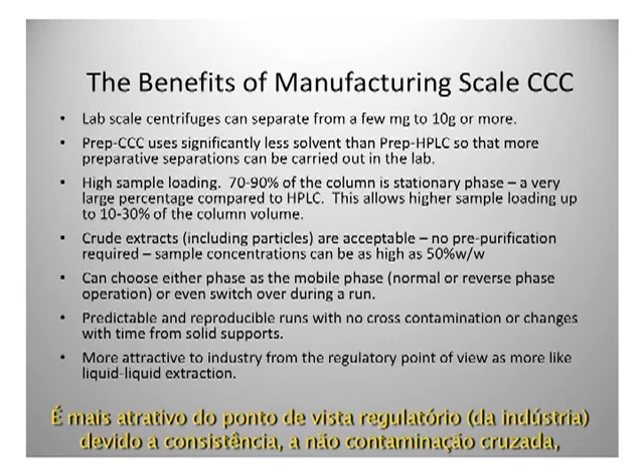And so in total, and I've already mentioned this, it is more attractive from a regulatory point of view, because the consistency, the lack of cross-contamination, the loading, all means that from a regulatory point of view, CCC has tremendous advantages when you scale it up.

Now when you're talking of scale up, the two important factors are how fast you do your run and how much you can load on each run. The faster you can do your run, the more runs you can do in a day, the quicker your separation is. The more you can load, the more you get done per run. Now your speed times your load, the product of the two, is your throughput. That's how much material you process, how much pure material you create in a day or a week.

Now, when you produce a graph of speed against load, here you have the speed from low to high along the axis, and from low to high on the vertical axis. HPLC, preparative HPLC, sits about there. In other words, the speed is moderate, it's okay, but the loading is poor. It's a very low loading on Prep HPLC.

If you go to normal phase HPLC, the speed is about the same, but the loading is slightly better. You can actually put more material onto normal phase chromatography. Flash chromatography is even better; you can see that you can load even higher amounts on. If you want to increase the speed of your HPLC, you can go for supercritical fluid chromatography, where the lower, less viscous mobile phase means you can push through higher flow rates, so you increase the speed.

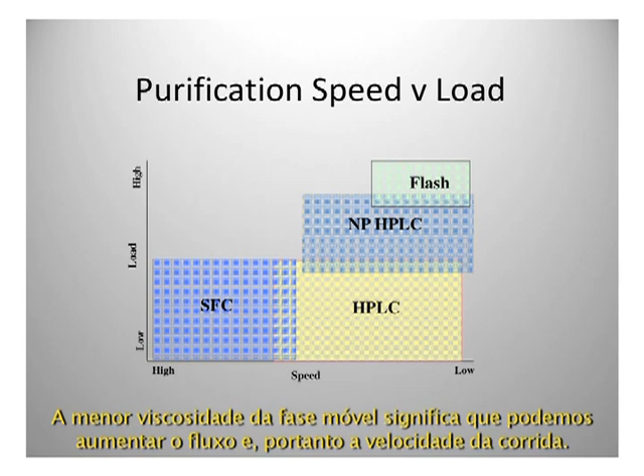Now, you'll see at this point here, there's a hole in the graph about there, and that is where I want to place high speed or high performance CCC. Now here I'm talking about high loadings and high speeds, and this is for talking about the high performance machines. So the high performance machines do very fast runs and they have high loadings as well, and that's where CCC fits in for the preparative scale.

So which one do we scale up? We've talked about hydrodynamic and we've talked about hydrostatic CCC. Which one do we scale up?

Now, as a brief bit of revision, I'm sure you all know this by now, the hydrostatic CPC, centrifugal partition chromatography, has a whole lot of interconnected chambers and is spun on a single axis. The mixing inside those chambers is a cascade mixing, just a jet of one liquid through the other. On the other side is the hydrodynamic, which is spun in planetary motion and is a single coiled tube. The mixing inside the hydrodynamic is a wave mixing.

The important point in why it's called a hydrostatic machine is that if you are spinning a hydrostatic machine and you switch off the pump, the mobile phase pump, then your stationary phase stays where it is. It is trapped in the little chambers. So your stationary phase is held in place by the design of the machine, and that's why it's called hydrostatic. The mass transfer occurs in each of those little chambers.

That says pretty much the same thing. The hydrodynamic behavior occurs in each chamber. And the most common form is the centrifugal partition chromatograph, where there is a series of interconnecting chambers and it spins on a single axis. But you need to remember that rotating seals are required. So that's a summary of the hydrostatic machine.

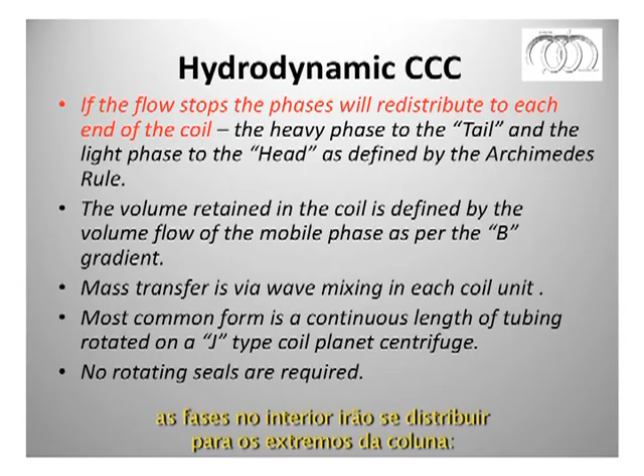In contrast, the hydrodynamic machine - if you're spinning it and you switch off the pump, the flow, the phases inside will distribute themselves to each end of the coil. The heavier phase will go to the tail of the coil and the lighter phase will go to the head of the coil. So even though you're not pumping anything, if the spin stays and you stop the flow rate, the phases distribute themselves to each end of the coil, and that's why it's called hydrodynamic.

So that means the volume of stationary phase retained in a hydrodynamic machine is very dependent on the mobile phase flow rate, whereas in a hydrostatic machine it was less dependent on the flow rate. The mass transfer is via a wave mixing that occurs within each coil loop. And the most common form is the J-type centrifuge, the J-type CCC, which we've been talking about a lot. But no rotating seals are required. You do have flying leads, but there are no rotating seals on the hydrodynamic machines.

Now in this talk, I'm going to be talking about scale-up of the hydrodynamic CCC, hydrodynamic countercurrent chromatography. Although there might be some debatable points here, we believe at Brunel University that there are challenges with scaling up the hydrostatic machines.

One of them: with a hydrostatic machine, the pressure is quite large, and when you scale it up, you can get some very high pressures. Remember, you've got rotating seals at either side, and higher pressures give you a bigger challenge to keep those rotating seals with high integrity.

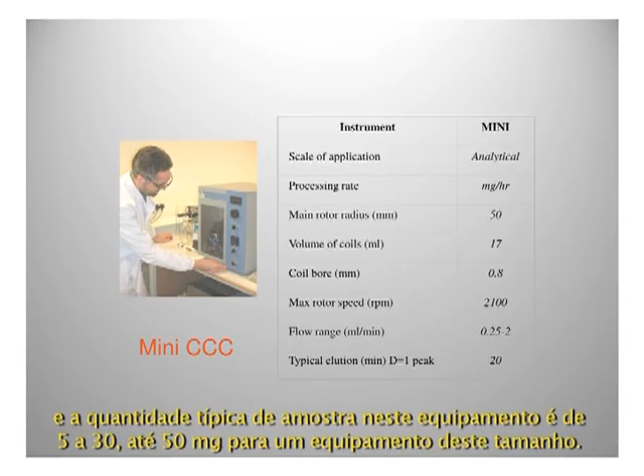Typical loading on this machine will be anything from 5 to 30, even up to 50 milligrams, on a machine this size, about the size of a microwave oven. To be able to inject 50 milligrams on a machine this size is quite impressive, because on an HPLC you'd need quite a large HPLC to be able to do that.

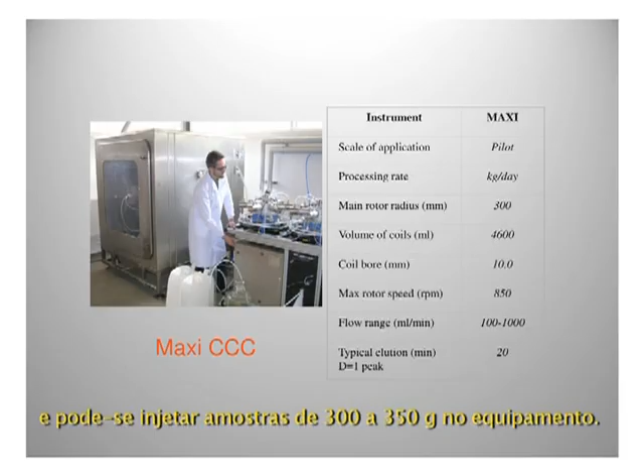Flow rate range is usually around about 600 mils a minute. Still the same runtime, 20 minutes, for a D equals 1 peak. And we can inject anything up to around about 300, 350 grams on this machine.

All of these machines are housed in the Bioprocessing Centre at Brunel University. Any of you are welcome to come and visit us. We're a research centre, we don't have any secrets in the machinery and what we've got in the Bioprocessing Centre. I'd suggest a good plan would be to come to the conference at Lyon in July, and London is only a short trip away. I'm happy to see any of you, I'll show you around the centre, show you the machine, and we can even look at how you could do some separations.

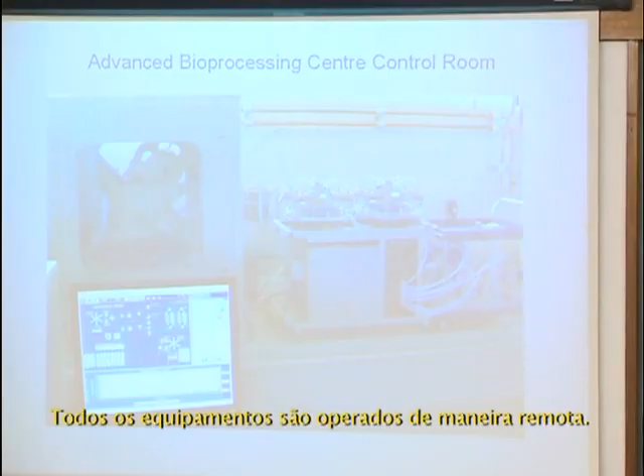In the front is a computer, a laptop with the software that runs the machines. But the important point about this particular operation is that the computer is in a different room, an operator room. You're taking the picture through a sheet of explosion-proof glass. All of the equipment in that room is remotely operated.

You put protective equipment on, such as the usual lab coat and gloves and mask if necessary, in order to go into the room to set up the machines, load your sample, put the solvent systems in place and so on. But once you've done all the setting up, you come out of that room, shut the door, and go into the operator room, where you can then run the machines.

Here is one of my colleagues, Peter Hewitson, doing a run. He is performing a CCC run on the large preparative machine, entirely operated from the operator room. The nice thing with the operator room is it is a clean room, you can take your cup of tea in there and your sandwiches.

The software was designed specially for us, a modification that Armen did for us. I don't need to go through the details of the software.

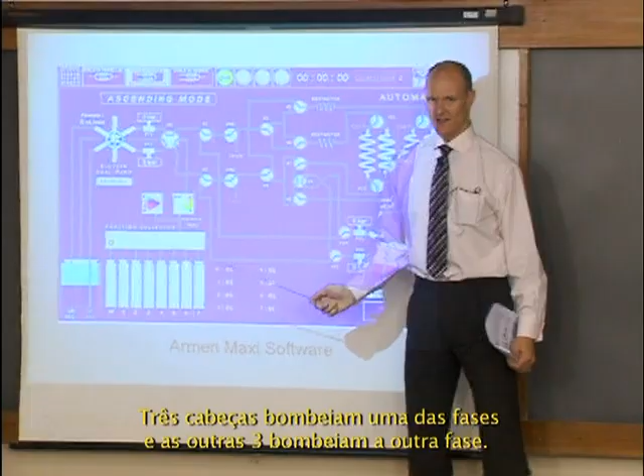Here are the two CCC machines. This is a 6-head pump, which is the elution pump. 3 of the heads will pump one phase, and 3 of the heads will pump the other phase. So we get a nice smooth flow with 3 heads, but we can very quickly switch from one phase to the other.

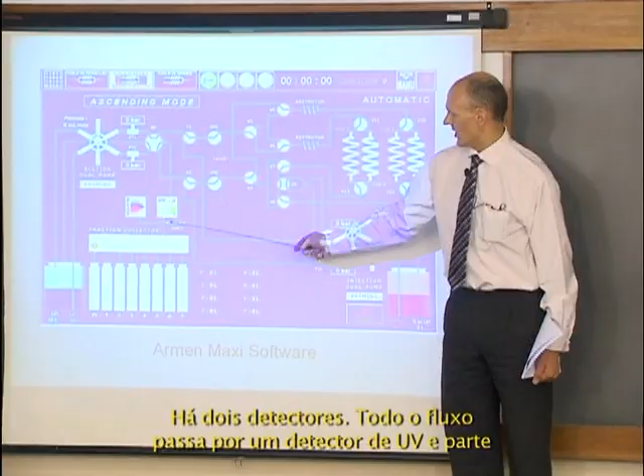And we've got all this complicated valving system in order to be able to do that. We have another pump here to introduce the sample, so we can introduce a sample from the upper phase, from the lower phase, or from both if necessary, using this other 6-headed pump. There are 2 detectors. The whole flow goes through a UV detector, but we've also got a bleed to a light scattering detector to make sure we don't miss any components. And then we've got the fraction collector just down here, so we can collect all the fractions. It's quite a good system with a good bit of flexibility in how we operate it.

Now, let's talk a little bit about the theory of the scale-up. You've seen this diagram several times.

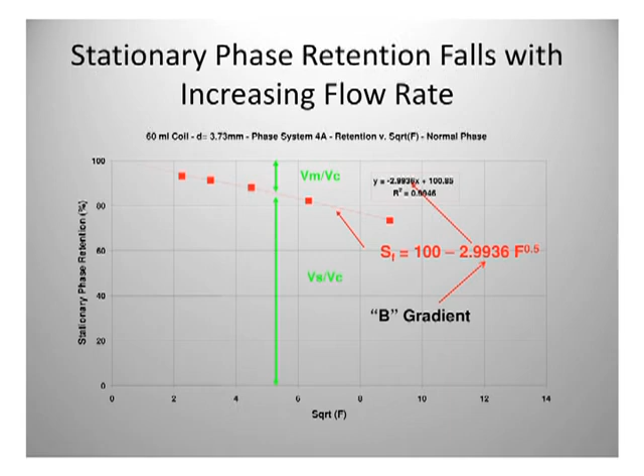Basically, the more stationary phase you retain in your CCC coil, the better resolution you get. So a lot of effort goes into trying to retain a high percentage of stationary phase in the coil. Now, as you know, when you increase the flow rate, you get less stationary phase in your coil. You just push more of the stationary phase out.

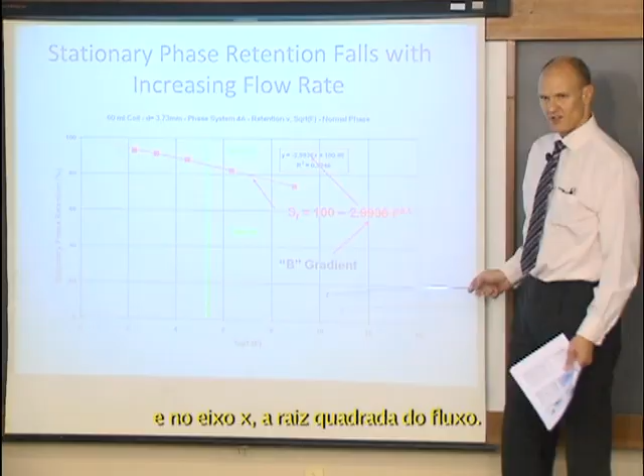This is a plot known as the Du plot, from the person who discovered it. What you have is the percentage stationary phase retention from 0 to 100, and along the bottom is the square root of the flow rate. It's the square root of the flow rate, because then you get a linear relationship between the stationary phase retention and the flow rate. So this point here is at 2.2, that'll be a flow rate of 5 mils a minute. This is 10 mils a minute, 20, 40, 80 mils a minute. You get a linear flow rate, but you get a drop of stationary phase retention as you increase the flow rate. That's as you would expect.

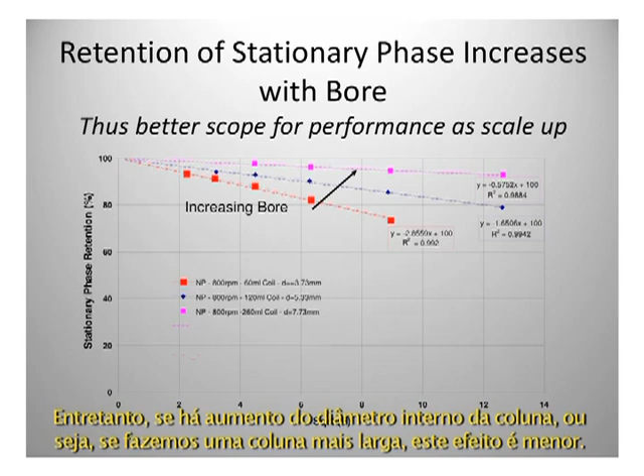Now, this is the line from the previous graph. However, if you increase the bore of the column, in other words, you make your column with a wider bore, this effect gets less. You get less drop in stationary phase retention with flow rate. So this one here is with a column bore of 3.73 millimeters. When you increase the bore to 5.33 millimeters, the effect is less. When you increase it to 7.73 millimeters, it's even less. So your stationary phase is more stable in the column with a greater bore, with a bigger bore.

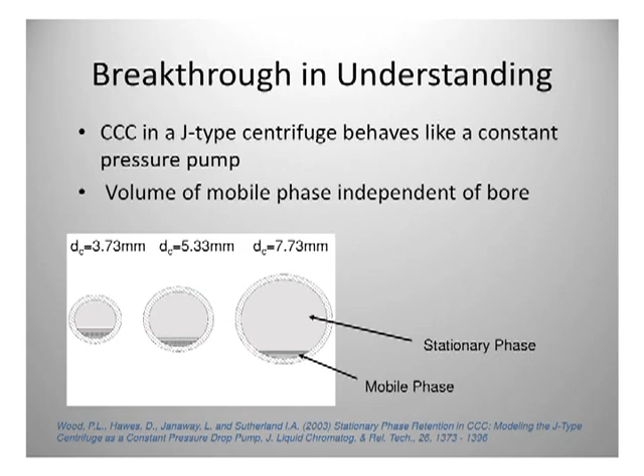The breakthrough in understanding, which produced a paper that I've referenced down here, was that the amount of mobile phase stays the same. But when your bore increases, that means that proportionally you have more stationary phase. And that was the breakthrough in understanding.

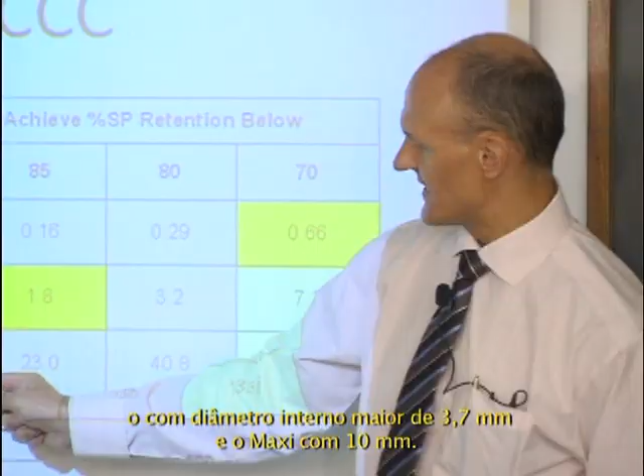Here's the effect it has, and I like to claim that this slide shows that scale-up with CCC gets better the bigger you make it. Here's 4 CCC instruments: the MIDI with a small bore of 1.6 millimeters, a wide bore MIDI with 3.7 millimeters, and the Maxi with 10 millimeters. So you've got 0.8, 1.6, 3.7, and 10 millimeters bore - that's the bore of the coil. Those are the machines down here.

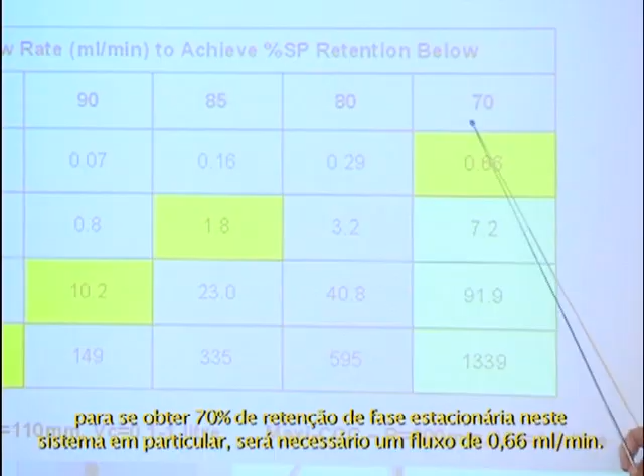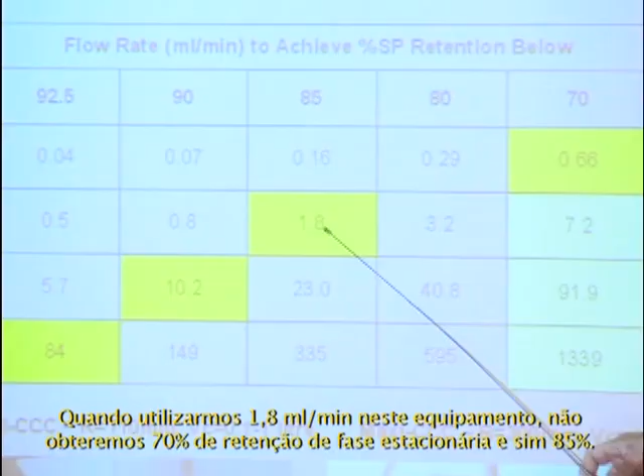In the table here is the flow rate required to get the stationary phase retention shown up here. So if we start off on the mini machine, the smallest machine with a 0.8 millimeter bore, to get 70% stationary phase retention for this particular phase system, you'll need 0.66 milliliters per minute flow rate. Now, if you want to scale up to 1.6 bore, and you do the calculations to find the flow rate needed to get the same stationary phase retention, the calculations tell you 1.8 mils a minute. When you actually go into the lab and type in 1.8 mils a minute on this machine, you don't get 70%, you get 85% stationary phase retention.

So you think, okay, I can up the flow rate - how much can I up it? Well, you can increase the flow rate to as much as 7.2 mils a minute and still get your 70% stationary phase retention. Again, you can do the calculation for the bigger machine, the wide bore mini of 3.7 - the calculations say 10.2 mils a minute will give you 70% stationary phase retention. In actual fact, you can have 92 mils. And likewise, when you go up to 10 millimeter bore, calculations say you'll need about 84 mils a minute, but in actual fact, you can go up to 1.3 liters a minute. So you are less likely to push your stationary phase out when you go for a bigger bore - the machine is more stable. The bigger machines are more stable.

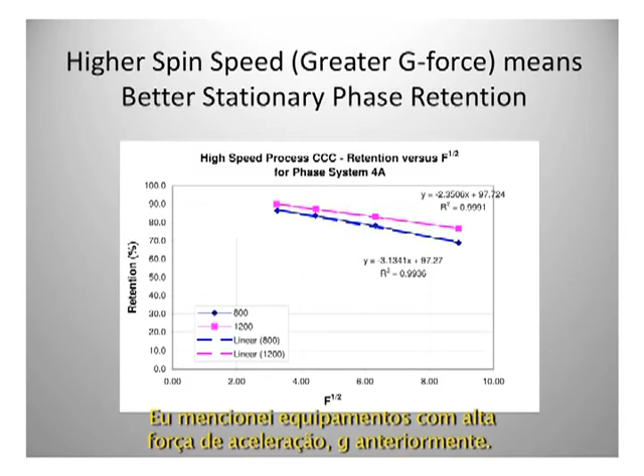Now, I've talked quite a bit about the G-force, and I've mentioned high G-force machines. The reason is fairly obvious: when you have a high G-force machine, you are more likely to retain your liquid stationary phase. Your machine becomes more stable.

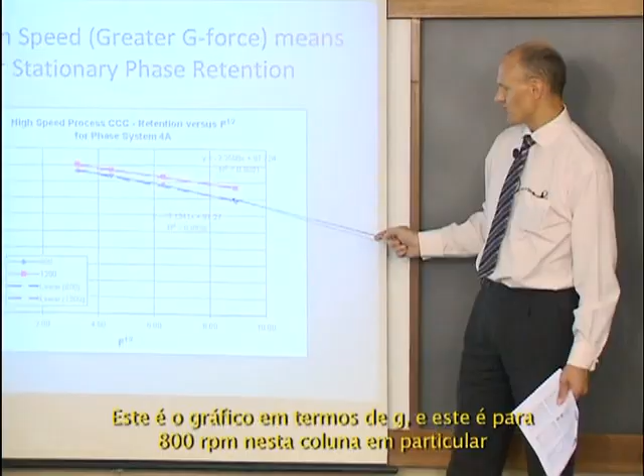Here again you have the stationary phase retention from 0 to 100, and here the flow rate has been square rooted. This is a Du plot, one for 800 revs per minute on this particular column, and this is what happens when you spin it at 1200 revs per minute. You can see you get an increase in stationary phase retention of about 10% for that increase in spin speed. So spin the machine faster and you can retain the liquid stationary phase better. That's as you'd expect.

But when it comes to scale up, you also get higher throughput when you spin the machines faster. Here we have the sample throughput, in milliliters injected per hour - how much we do per day of injections or sample. And here's the flow rate, this time straight in milliliters per minute.

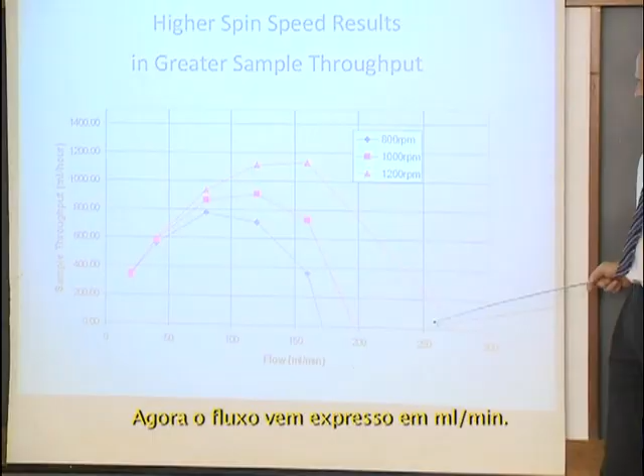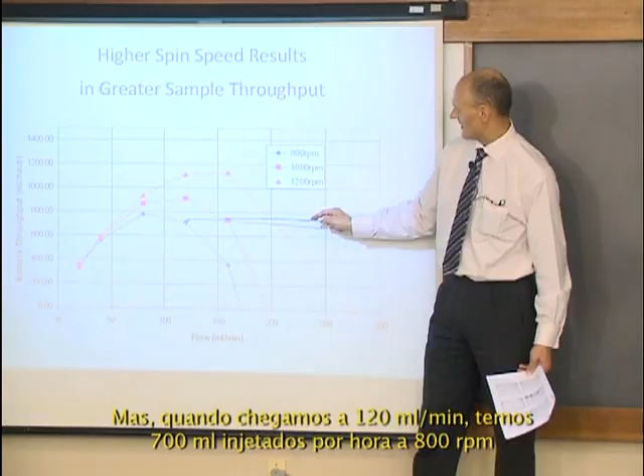This curve here is at 800 revs per minute, this one at 1000 revs per minute, and this one at 1200. You can see that at 40 mils a minute, it doesn't make much difference what the spin speed is - it's about the same for all three. But when you come to 120 mils a minute, you have 700 milliliters injected per hour at 800 revs per minute, or you can raise that up to 1100 milliliters per hour at the higher spin speed, 1200.

When you come up to 160 mils a minute, you basically start losing it all at the lower spin speed. But you're still increasing in sample throughput, not much - it's plateaued a bit - but still increasing slightly at the higher spin speed. So you get much better throughput of sample at your higher spin speed.

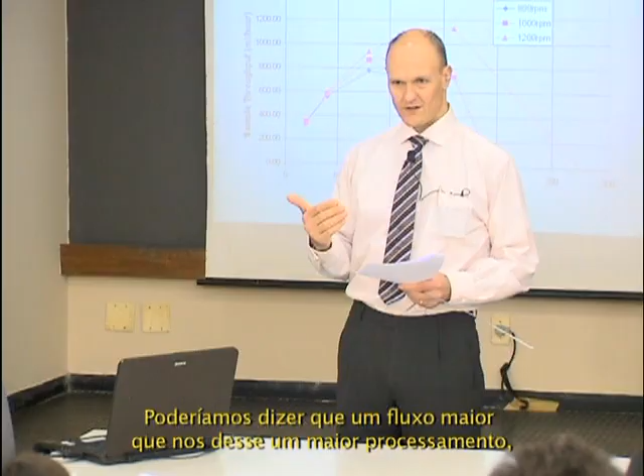You might say that a higher flow rate, in order to give you higher throughput, might mean you get more sample through but you lose your resolution. Well, you do, but not by very much.

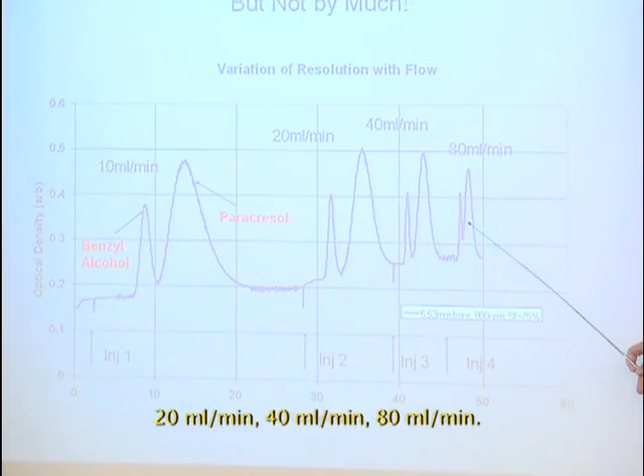This is on a wider bore column, 5.53 millimeters, with an injection of two standard compounds, benzyl alcohol and paracresol, at 10 mils a minute, and you can see you get almost baseline resolution. 20 mils a minute, 40 mils a minute, 80 mils a minute - there is a loss of resolution, but it's not a huge loss, and you're getting considerably faster throughput of sample.

So the wider bore columns retain the stationary phase better, you can inject more sample, you can drive them harder, and you don't get much loss of resolution.

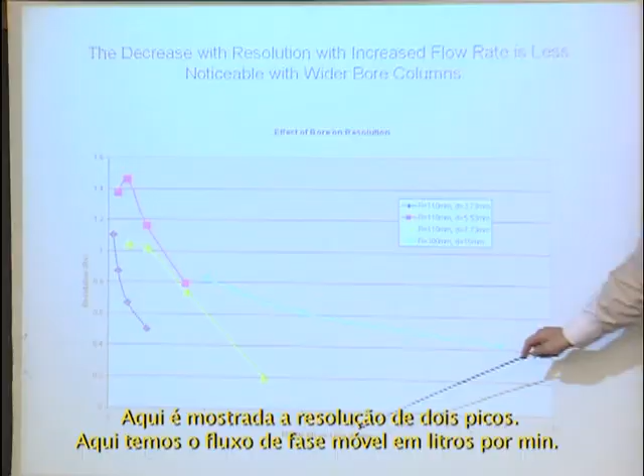Here you have the decrease in resolution, showing that the wider your column bore, the less your resolution declines when you increase the flow rate. Here you have resolution of 2 peaks, here the mobile phase flow rate in liters per minute, and here it's shown for 4 different column bores. The dark blue line is for a column bore of 3.73 millimeters. You can see that as you increase the flow rate, your resolution drops dramatically - you just lose your resolution completely.

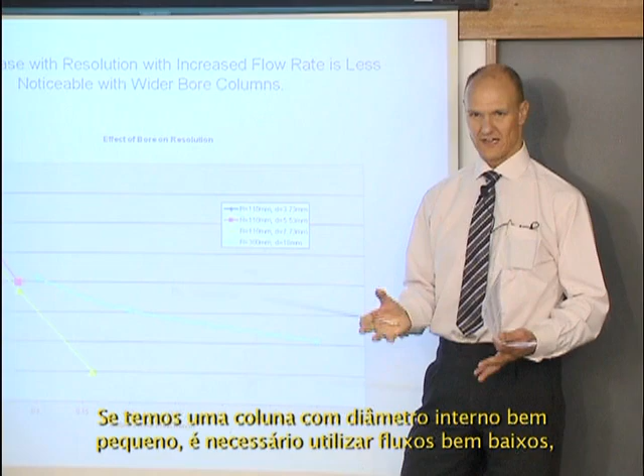So if you have a small bore column, you need to run it really slow, otherwise you get very poor resolution. When you go up to 10 millimeters, as you increase the flow rate over a very wide range, you don't get that much of a drop in resolution - the line is fairly stable. So with a wider bore, you can increase the flow rate and not lose your resolution very much. The wider you make the bore of the column, the more you can increase the flow rate and the less you lose in resolution.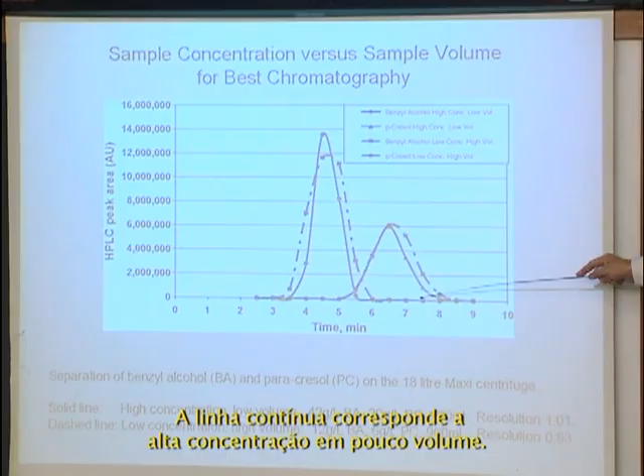This slide asks the question: which is better? Is it better to inject your sample with high concentration and low volume, or with low concentration and high volume? Here are the benzyl alcohol and paracresol injected. The solid line is high concentration and low volume. The concentration was 42 grams per litre benzyl alcohol, 20 grams per litre paracresol, and 290 milliliters was injected onto the 18-litre machine.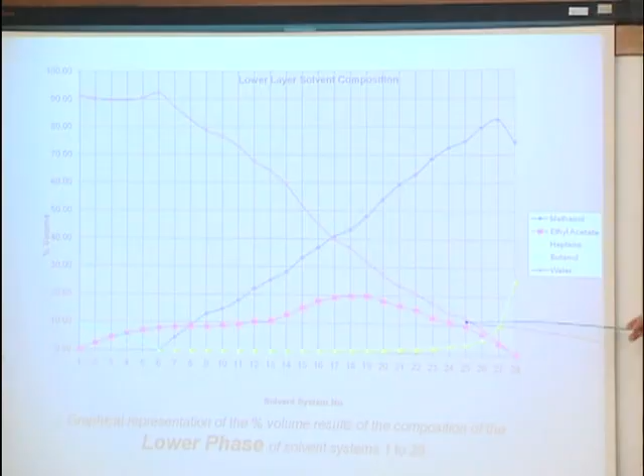There are two advantages to analysing the phase system. The first is we make up as much upper phase and as much lower phase as we need, making it up to order using that composition table from the analysis.

The second advantage is we recycle the phase. When we've done a run, we collect the fractions and dry them down anyway. We take the solvent out of the rotary evaporator, do a quick analysis on the gas chromatograph, then reform the composition back into the mobile phase, and it goes back into the machine for the next run. So there's a recycling of the phase.

What we tend to find is if you're using a hexane ethyl acetate methanol water system, and you're using the hexane ethyl acetate phase as the mobile phase, the chances are you will have just lost a bit of hexane. That's usually all you need to top up, just a touch of hexane, and it can go back into the machine, remaking the solvent phase back as it was.

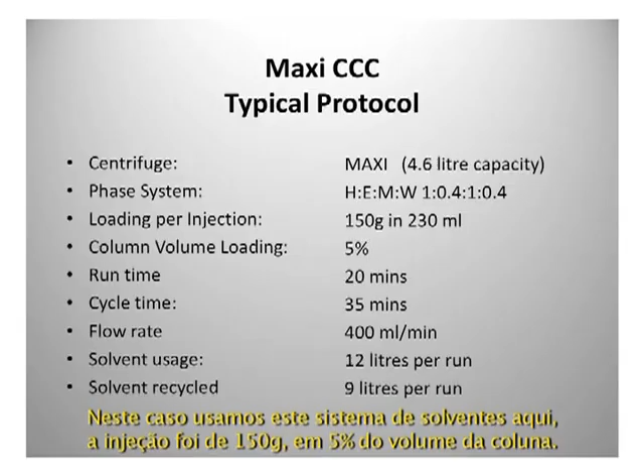So this will be a typical protocol for the 5-litre machine. In this case we're using this solvent system here. The injection was 150 grams in that material, which is 5% of column volume. The run time was 20 minutes.

Cycle time is 35 minutes. In other words, the run finished in 20 minutes, but it then took another 15 minutes before the machine was ready for the next run, for dealing with fractions or whatever.

That's the flow rate. 12 litres of solvent are used per run, but 9 litres of that is recycled. The only reason the other 3 litres aren't recycled is that those fractions were so grotty it wasn't worth the effort of drying down the solvent - we just decided we'd sacrifice 3 litres of solvent per run.

You could recycle the whole lot, but you've just got to dry down the whole lot, and we decided they were so mucky it wasn't worth it. So that is a typical protocol - a large percentage of the solvent is actually recycled during the run.

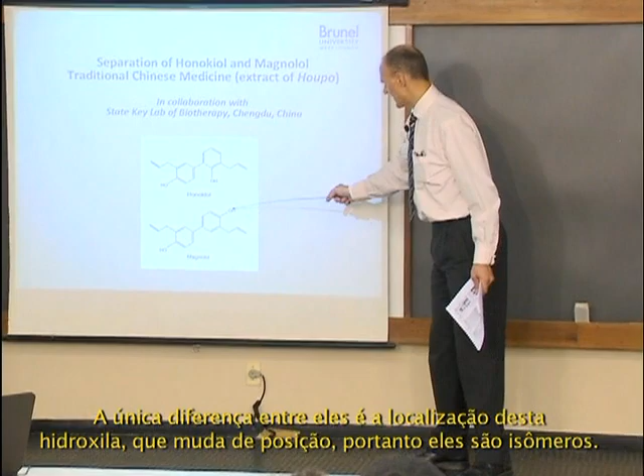Now, I talked a little bit about injection loading - here's a bit more detail. This particular example is a separation of two compounds, honokiol and magnolol, both natural products from Chinese medicines. The only difference between them is the location of a hydroxyl group, which has just changed position, so they're isomers.

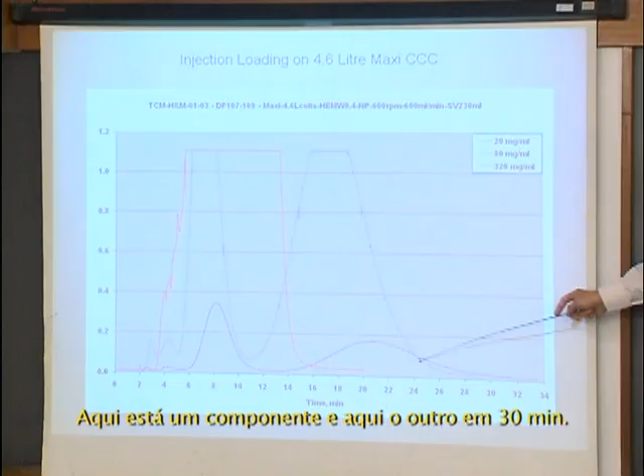When we were doing this run, we started off injecting 20 mg per mil on the 5-litre, 4.6 litre machine. That gave this chromatogram - there's one compound, there's the other, 30 minutes here. We got really good separation, with small peaks.

We thought we're obviously not loading the column enough, so we went 4 times bigger and injected 80 mg per mil. That gave this chromatogram, obviously with considerably more compound eluted, and we've still got almost baseline resolution between the two components. So we thought, well, we haven't reached the limit yet.

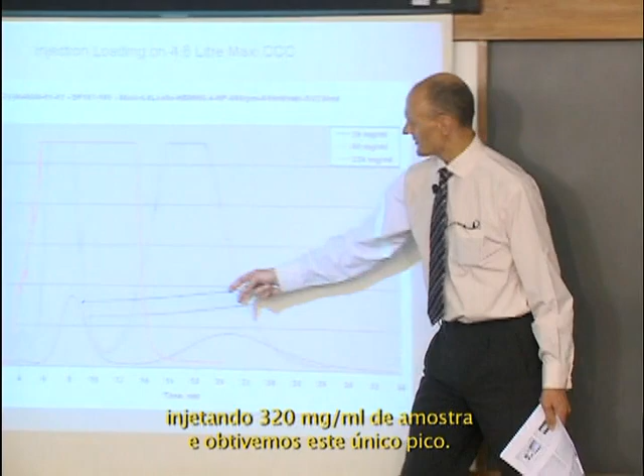Let's go the whole hog - we injected all the rest of the sample at 320 mg per mil, and got this single peak. We noticed it came off in 16 minutes. We thought, oh dear, we've blown it - we've just gone and achieved nothing, the sample has come off in a single peak.

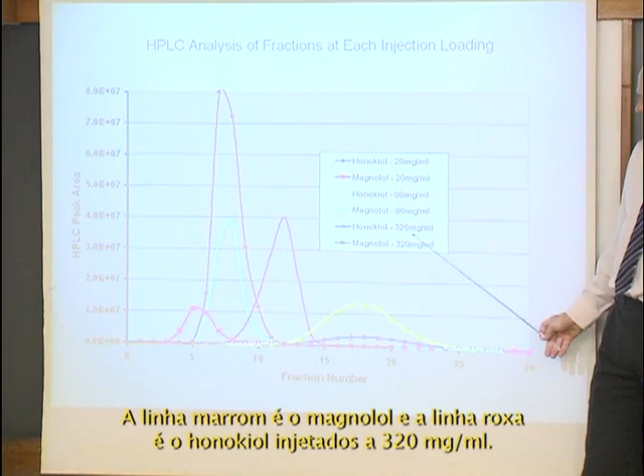But fractions were taken across that peak, and here are all the fractions and their analysis. The brown line is the magnolol, and this purple line is the honokiol at that injection of 320 mg per mil. You can see you've got not a bad separation, even though it came off as a single peak. So the separation occurred, even though when we looked at it, we thought we'd actually just blown it and come off as a single peak.

Now, for the rest of my talk, I'm going to talk about three special modes of operation. So far, we've talked about standard, traditional countercurrent chromatography - hydrodynamic CCC, where you have a simple coiled tube spun in planetary motion, creating waves of mixing and settling. Being a research centre at Brunel University, we're interested in finding ways that might be more efficient and better, particularly with respect to improving the scale-up and getting better throughput of compounds.

The first I'm going to talk about is toroidal coil CCC, which is particularly interesting for the purification of biomolecules. Normally CPC, the one with all the little chambers, hydrostatic CPC, is used for purification of proteins, DNA, plasmids and viruses, because the stationary phase can be retained in the coil by being trapped in those little chambers. However, industry doesn't like CPC very much because of the danger of cross-contamination, the difficulties in scale-up, and so on.

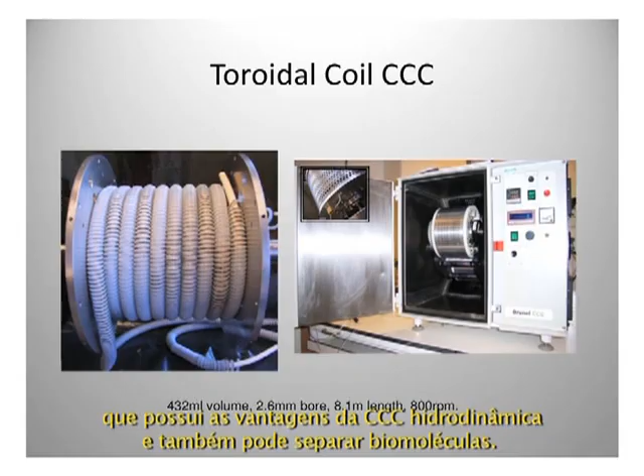So we have made this machine, which is a toroidal coil. It was initially invented by Dr. Ito, but we have created this toroidal coil machine, which has the advantages of hydrodynamic CCC but can also separate out biomolecules. The way it works is your coil, instead of just being coiled round in a multi-layer coil, is coiled round like this and then like that - almost like taking a hollow telephone cable and wrapping it around in a coil. Then it is spun in the normal planetary motion.

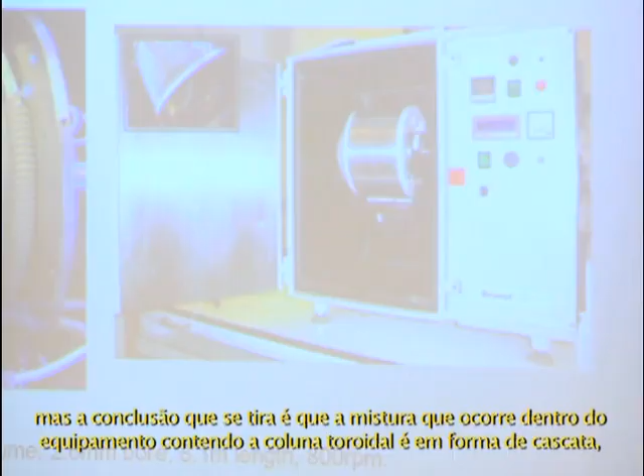As you can imagine, some fairly complex mixing goes on inside there. But the bottom line is that the mixing that occurs inside the toroidal coil machine is the cascade mixing that occurs in the CPC machine, not the wave mixing that occurs in the multi-layer CCC machine. So we've basically created a CCC machine with a single tube wound in this toroidal coil manner - it's got a single tube, but it's got that cascade mixing.

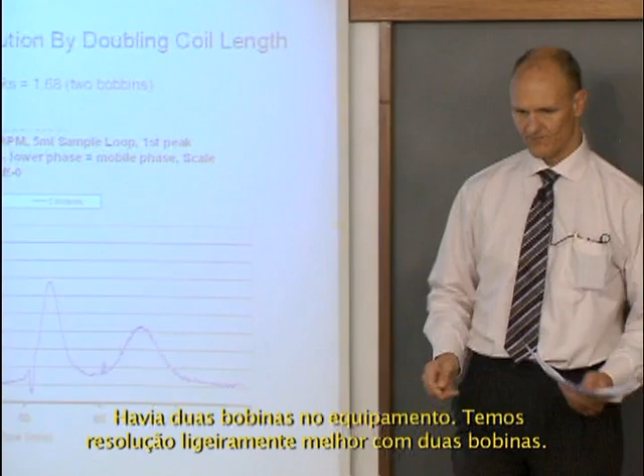So how does it perform? Here we have the injection of two proteins. If you look at the green line first, this is lysozyme and myoglobin, and separation has occurred here with just one bobbin, and this is a separation with two bobbins. Both had two bobbins on the machine, so you get slightly better resolution with the two bobbins for a longer time. The separation here is about the same performance as would occur on a CPC machine.

The reason we think the toroidal coil is going to be important for scale-up is that because it's just a single tube, you can clean it easily, deal with particulates, and it can be scaled up. We found that when putting the aqueous two-phase systems required for proteins into a multi-layer CCC coil, we could retain the liquid stationary phase very easily. That wasn't a problem, but we still didn't get very good separation, because we weren't getting good mixing of the two phases. The wave mixing works very well with aqueous organic solvent systems, but not so well with viscous systems like aqueous two-phase systems. So the different mixing of the toroidal coil machine solved that problem - we get both retention and mixing, and therefore separation of the proteins.

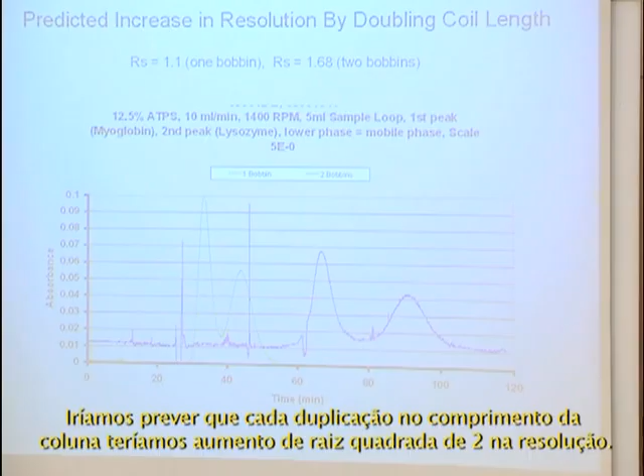Here we've basically increased the coil length in order to give better resolution, and the resolution has increased as predicted with CCC theory. You would predict that for every doubling of the coil length, you get a square root of 2 increase in resolution - the resolution is proportional to the square root of the coil length. So you double the coil length, you get a 1.4 times improvement in resolution, and that is exactly what we see here. So it's behaving as predicted by CCC theory.

However, what's interesting here - here's the resolution again in the toroidal coil machine, and here is the rotational speed. As you increase the rotational speed, we get an increase in resolution, but then it plateaus. That was puzzling us for a while.

Then we realized in the toroidal coil machine you have these loops - remember, they go round like this and then round in the coil. As the machine spins in its planetary motion, the mobile phase at low spin speed will run round the walls of those loops - it'll stay stuck on the walls and run around them. As you increase the spin speed, you pull that mobile phase away from the walls and it starts going down the middle of the tube, and you get much better mixing.

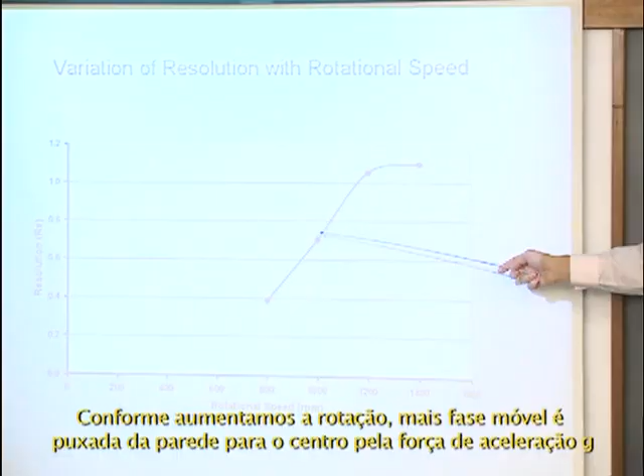As you increase the spin speed, more of the mobile phase is pulled away from the walls by the g-forces, and you then get it passing down the middle of the tube. But you don't get any further improvement because the mobile phase is jetting down the middle of the toroids. That is the theory as to why we get this plateau in resolution at a certain spin speed.

So for the toroidal coil machine, there is an optimum spin speed, and on our particular machine, there is no point in running it more than 1200 revs per minute. That's different from the normal multi-layer CCC.

This slide shows the big advantage of the toroidal coil machine. You have a run where you've got something coming off the solvent front. Here's the separation of the two proteins, lysozyme and myoglobin, that we did before.

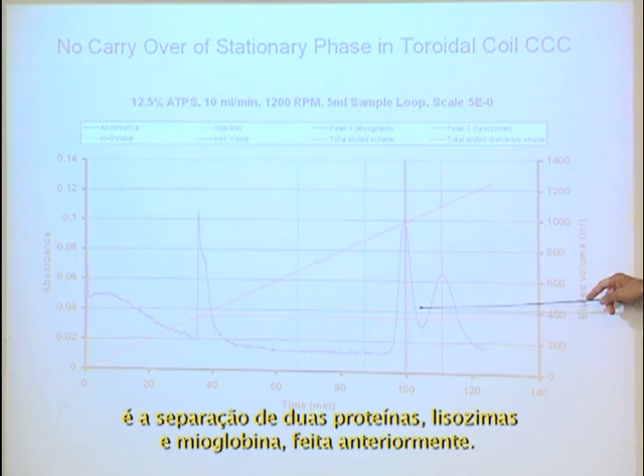This line here shows the eluted volume, so this is what was coming out at the end of the coil. And as you'd expect, you've got just a standard linear line because we kept the same flow rate all the time.

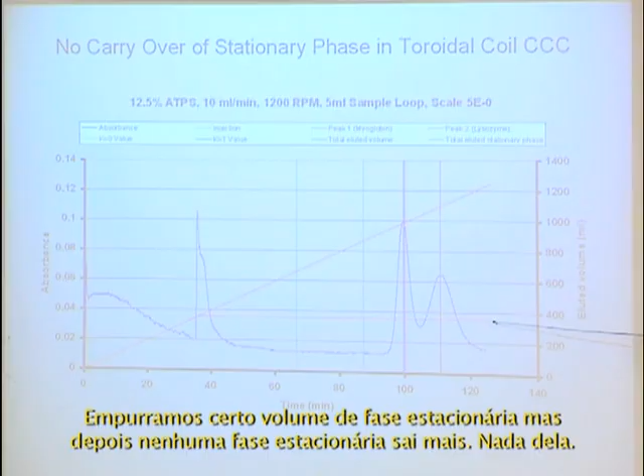But the orange line is the amount of eluted stationary phase, and the purple line is the amount of eluted mobile phase. You can see that when we started the run, we get stationary phase coming out at first, as you'd expect. You fill the coil with stationary phase, you start pumping, you start the spin, start the mobile phase. You push out a certain volume of stationary phase, but then no more stationary phase came out. None of it. The thing was very, very stable.

In other words, there was no bleed of stationary phase, and that is a big advantage because with CPC, you often get a bleed of stationary phase coming out.

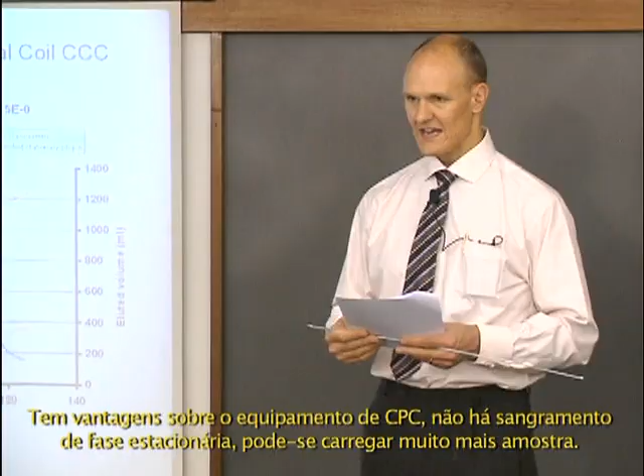So overall, this toroidal coil machine is, we think, going to be very useful for the scale-up of biomolecules and proteins and other fragile molecules that don't like aqueous organic phase systems. It has advantages over CPC machines in that you don't get any stationary phase bleed. You have much higher loadings. We calculated that you get about a 42% increase in throughput with the toroidal coil machine over a CPC machine.

It is scalable. There is no reason at all why the toroidal coil machine can't be made up to 5 litres, 18 litres, 40 litres. It is scalable, whereas the CPC machines have challenges in scale-up.

And finally, it's got the advantages over CPC — it's easy to clean, you can sterilize it, and it can cope with particulates as well. So the toroidal coil machine might well be the future for the scale-up of biomolecules and proteins.

Now going on to special mode of operation number 2, non-synchronous CCC, and this is for the perfect mixing and settling of solvent systems.

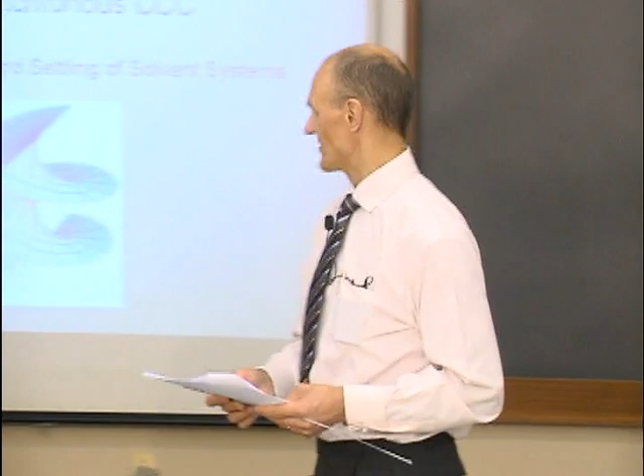Now, so far, we have talked about the synchronous CCC, J-type chromatographs. Called J-type, of course, because of the leads just here. And you have a stationary sun gear, and you have a rotating planetary gear, and this rotates around like this, so that it spins on its own axis, and it rotates around the stationary sun gear.

As you know, the leads don't twist up. I'm sure you've seen it in the model, and you've seen it actually in the lab. It's a little bit difficult to get your head around why the leads don't twist up, a little bit difficult to actually work it out. I quite like this picture showing why it is that leads don't twist up.

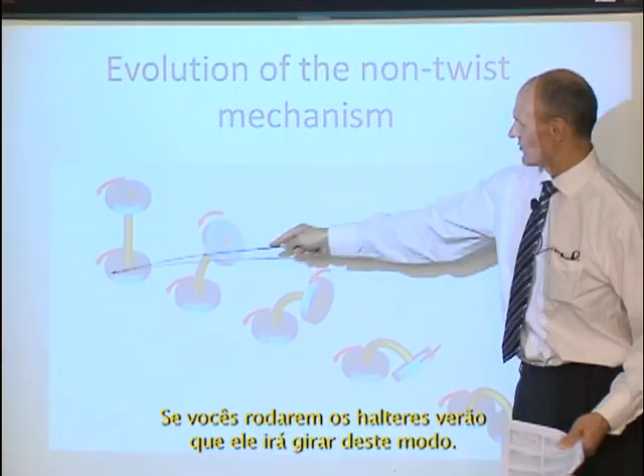Imagine you have a dumbbell, a bit like people use for weights, but this has got a rubber handle. If you rotate that dumbbell, you can see that this will rotate the same as that — no problem there. Now keeping it rotating, you just bend the handle over, and you will now have the two rotating like this, still with your handle in the center. And that is why the leads don't twist up. Here we've got both rotating, but what we could do is you could hold that one and just rotate this one around it. And there's your J-type CCC machine. That's why the leads don't twist up.

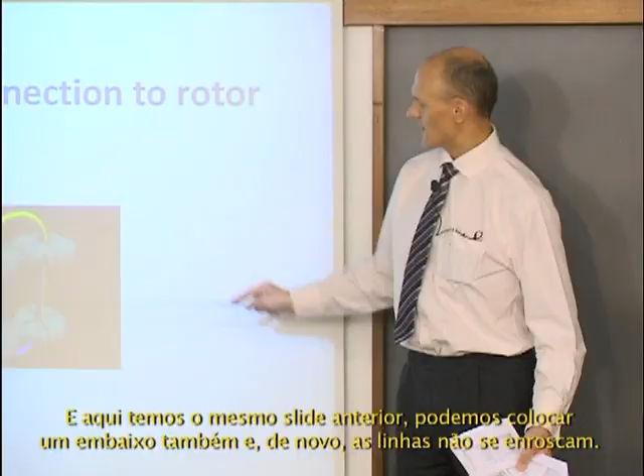And that just shows — here's the previous picture. You can put one on the bottom as well, and again, the leads won't twist up. So there you've got your J-type machine.

However, there's a penalty though. In order to not have the leads twist up on the J-type CCC machine, you are fixed to one rotation around the sun gear for one spin around its own axis. You're fixed to a 1-to-1 ratio — it spins and it rotates, and you're fixed to that ratio, meaning you get one mixing step and one settling step per spin around the sun gear. Is that the optimum? Could it be that you need more mixing steps, fewer mixing steps?

So this is the reason why you might want to look at a non-synchronous CCC, or this is the reason why we did this research. We thought perhaps there are some phase systems where you want lots and lots of mixing and then only settle it occasionally, or just a small amount of settling. Or it might be that you have a delicate phase system, like the aqueous two-phase systems, where you don't want to mix it too vigorously, but you want a very strong settling force.

So being able to alter that ratio of mixing to settling is what the non-synchronous CCC is all about. It's taking away from that 1-to-1 ratio and making it so that you can alter the amount of spin to the amount of rotation. But you might say, there's a penalty - you need a rotating seal, much like the CPC machine has.

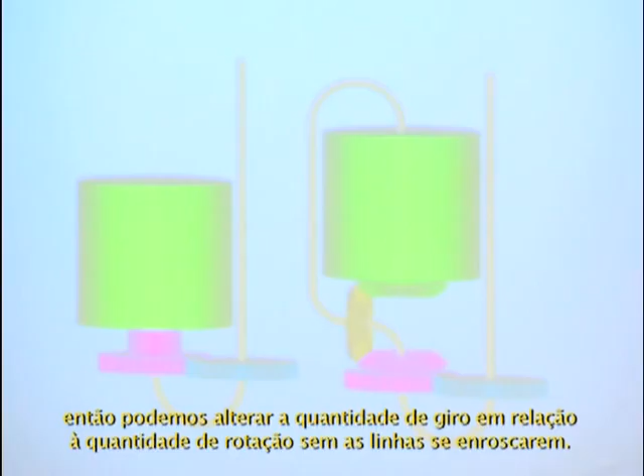No, you don't. If you design - and this has all been done by the engineers - here's your J-type machine. If you design your flying lead with this clever mechanism just here, then you can alter the amount of spin to the amount of rotation without this lead twisting up. Now, you might not quite be able to get your head around it, I can't, but trust me, it works. I've used this machine and I haven't seen the leads twisting up, so trust me, it works. The engineers will tell you how it works, but the leads don't twist up.

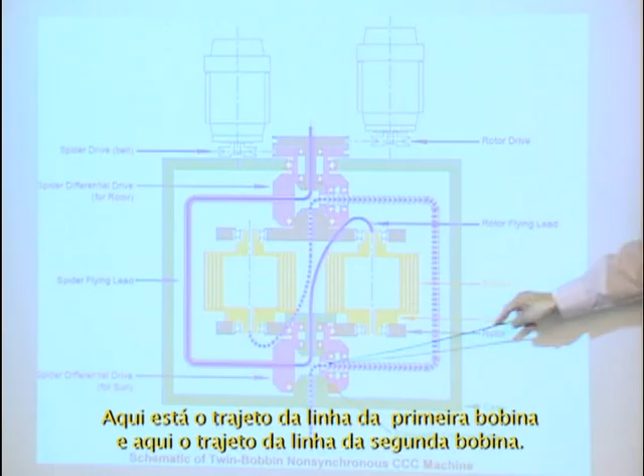This is the engineering diagram of the machine. You need two motors, because you now need a motor in order to spin the coil, and then you need another motor to rotate it, because they'll be going at different speeds. And here's your lead path for the first bobbin that's just here, and here's the lead path for the second bobbin, just there.

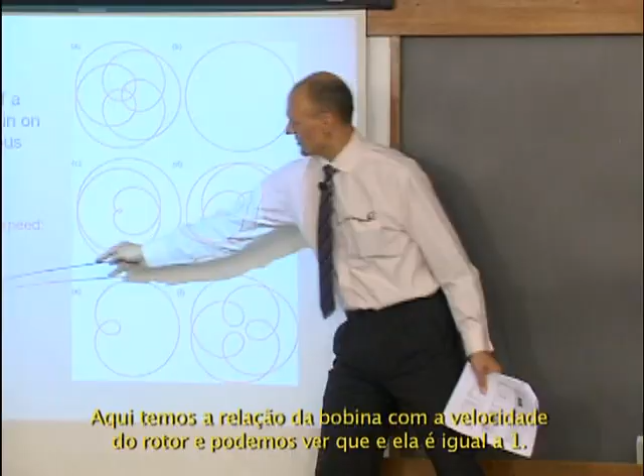When you can alter the amount of mixing and the amount of settling that occurs, you can get all sorts of interesting patterns. Here is the one we had on the last slide. This is with the 1-to-1 ratio. So here is the ratio of bobbin to rotor speed. And you can see that on E, it's at 1. So when you've got a 1-to-1 ratio, you get the cardioid shape.

When you have a 0, you get it like this. And I think I'm right in saying that will be an I-type machine. Am I right? This will be an I-type machine, which will be a bit like taking a beaker and swirling it round like this.

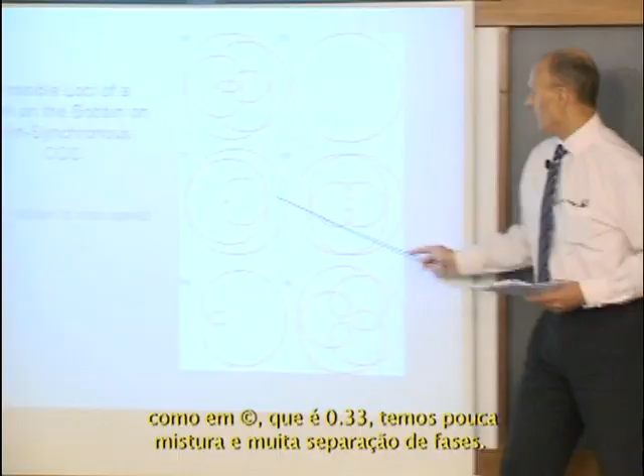If you have a ratio of, now let me get this right, C, 0.33, you can see you've got a little mixing and lots of settling. What you're getting there is you're getting the rotor rotating 3 times for every mixing cycle.

Here with, what am I looking at? F. So F here, you're getting 3 mixings for - let's have a look - the rotor rotates 2 times for every 3 mixing cycles on this particular one. And on this particular one just here, you can see it's a minus value. The rotor is rotating in the opposite direction to the spin of the machine.

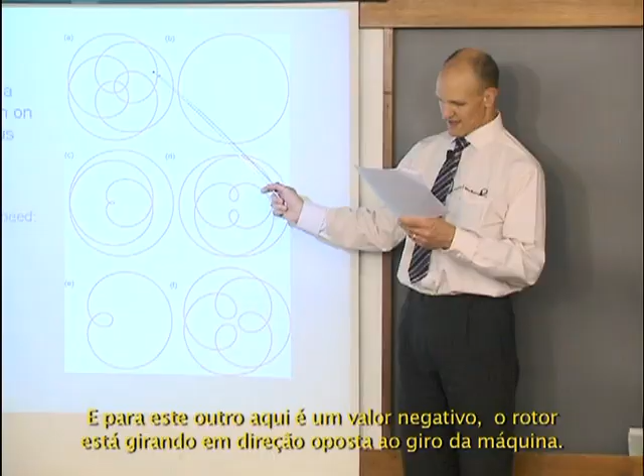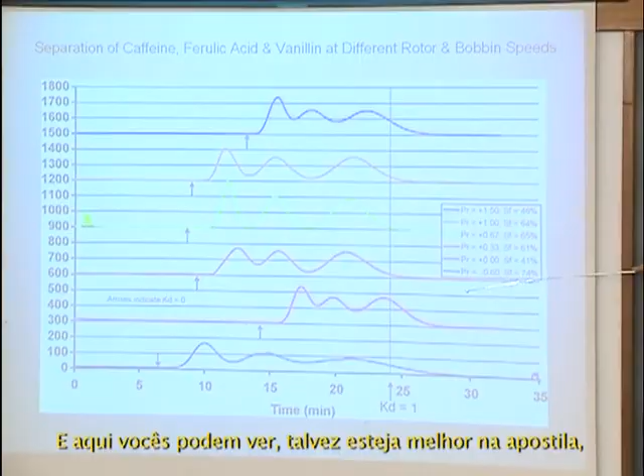Well, what we did was we took all of those different ways of operating, all 6 of them, and we injected 3 compounds onto the machine to see the separation. The 3 compounds were caffeine, ferulic acid, and vanillin, and here are the 6 different ways of operating, and you can see, I don't know if you can see it from there, but it might be visible in your book. Here is the different ratio of rotor to bobbin speed, and we measured the stationary phase retention.

Now, the 1-to-1 ratio is this orange line just here, and you can see in this particular case, you've got quite a good separation. But you get a 30% better separation with this one just here, which is a 0.67 ratio of the rotor to the bobbin. So by altering the ratio, you actually can improve the resolution of your components by 30%.

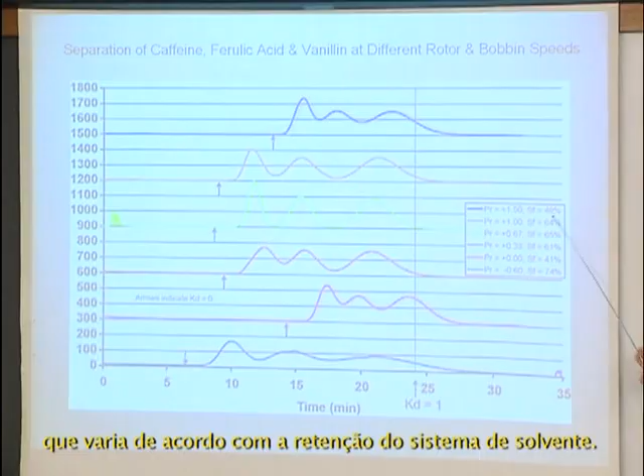By the way, this arrow is the D equals 0 point, or KD equals 0, which is the solvent front, which will vary according to the stationary phase retention. And this line here is the distribution ratio equals 1 point, which of course is your column volume, so it's fixed for all the machines.

The interesting thing with this machine is that by being able to alter the amount of mixing and settling, you'll be able to fine-tune your separation to your particular solvent system. You can well imagine that some solvent systems will require vigorous mixing but only a little settling.

Others require much more gentle mixing and a vigorous, strong settling. But you could optimize your conditions and get perfect separation by having a non-synchronous machine, which you could then tune to the right degrees for your particular solvent system.

So the next work on the non-synchronous machine is, of course, looking at aqueous two-phase systems.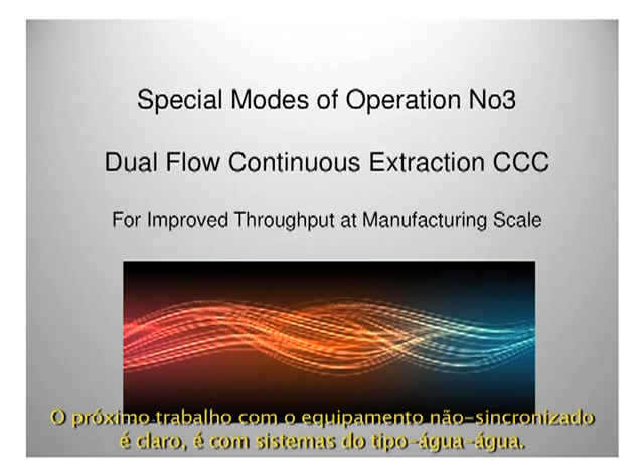Now my final special mode of operation is called dual flow continuous extraction, CCC. It's a bit of a mouthful, but basically what we're talking about here is continuous processing. You want improved throughput at manufacturing scale, and this is with continuous processing, so it's almost true countercurrent chromatography.

So far we've talked about countercurrent chromatography, where you have a stationary phase and a mobile phase. Now this is the countercurrent chromatography coil. You've just got to imagine that this is coiled up, it's spinning, there are waves of mixing and settling going on. It's just diagrammatic of the CCC coil.

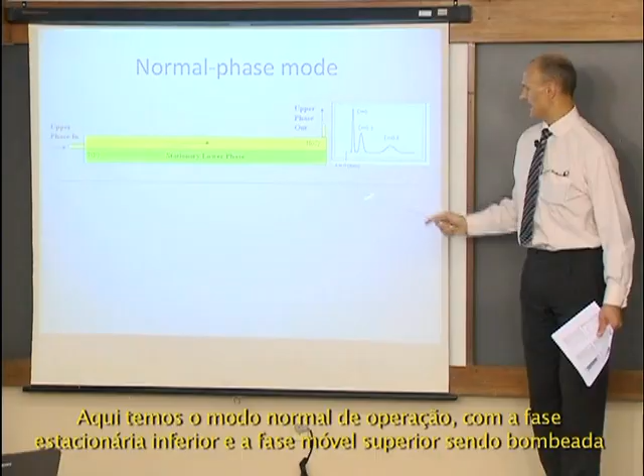But here it is in normal phase operation, where I've got a stationary lower phase and a mobile upper phase. I pump the mobile phase in, it comes out here, and my components will elute in order of their distribution ratio - 0, 0.3, 0.8 - coming out in order of distribution ratio.

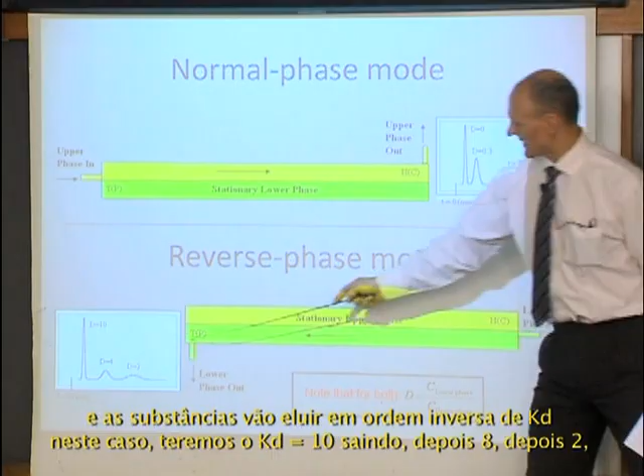Of course, the alternative is that I could make the upper phase the stationary one and pump the lower phase in, doing it the other way around, and my components will elute in reverse order of distribution ratio. I'll get D equals 10 coming out, then D equals 4, D equals 2 - assuming I keep the same ratio for calculating the distribution ratio.

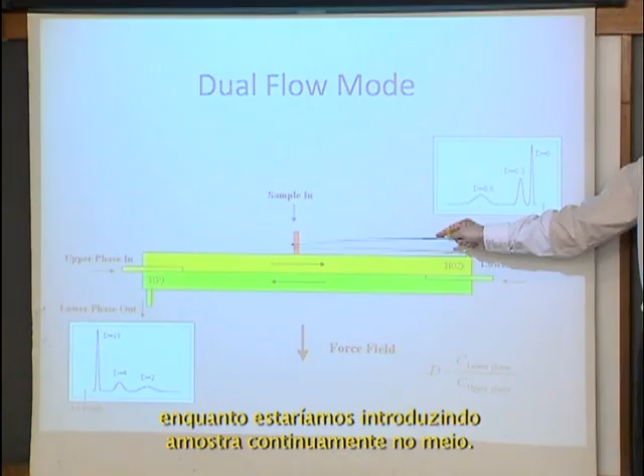The question you ask is, why not introduce the sample in the middle? Why not just put it in the middle and flow both phases over each other? Then could you get your low distribution ratio compounds out at one end and your high distribution ratio compounds out at the other end, continuously introducing your sample into the middle? That was the question that we had.

Does it work? It looks quite complicated to set up, but it's actually not that bad, because most countercurrent chromatography machines, particularly the larger ones, will have two bobbins. And the leads don't twist up on a synchronous machine, remember. So here's your first bobbin, here's your second bobbin.

And since the leads don't twist up, you can just take the lead out of the machine, add your sample input, your injector, and then put the lead back into the machine for the second bobbin.

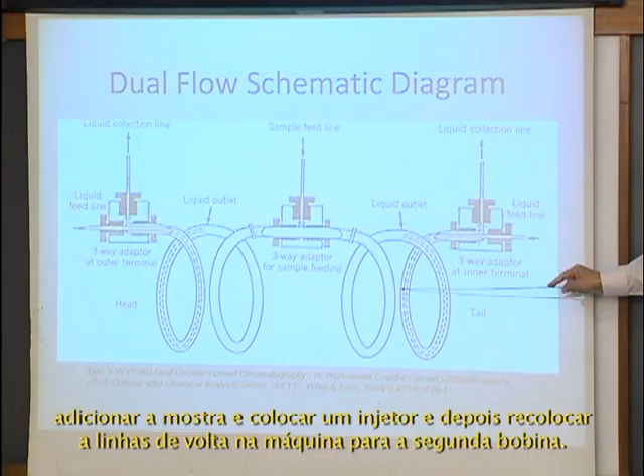The only complication you have when trying to operate it continuously is that at each end of the machine you've got both an inlet and an outlet. You are pumping liquid in and collecting the other liquid coming out.

Now, in order to stop your liquid that's being pumped in from just coming straight out of the outlet, you've got to put a tube within a tube in order to get the liquid started on its way down the coil, and then once it's started, it just carries on going through the coil. So that's the only slight complication. Otherwise, it's actually a pretty simple machine to set up.

So just to round off, I have talked quite a lot about CCC and the scale-up of CCC, and I hope I have shown you that it gets better as you make it bigger. It's a preparative technique with a lot of advantages when you make it big, and I think it won't be very long before industry starts to realize that, and we start to see preparative CCC actually being used in pilot plants and manufacturing plants.

How big can it get? Well, we make jokes that they're not using the Millennium Wheel to very good effect at the moment, and what we'd like is a nice big coil put on it. You won't need to spin it very fast, remember - big size, slow rotation, because you get the same G-force. So how big can it get? Well, we really don't know.